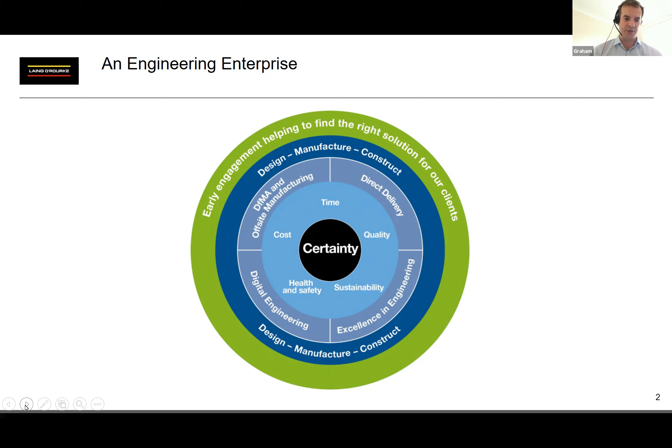Laing, and I always struggle a little bit with how we move this on. There we go. Laing O'Rourke, if you don't know us, we're a tier 1 contractor in the UK, Middle East and Australia. We are an engineering enterprise that continuously strives to deliver certainty to our clients. And I'll talk a bit more about that, and then that explains why we've gone on the particular journey we have. We build a series of great projects, some of which you'll undoubtedly know, but not solely London focused, although the 3 on the right clearly are. Francis Crick, very close to my heart.

I spent the last 10 months of that project's life delivering it because it had major systems integration challenges. So there are some other benefits to being a techie every so often, but obviously we deliver up and down the country. And if I look at what we're delivering today, we're delivering everything from a cancer hospital in Wales, a brand new hospital in Brighton, and we're delivering the Edinburgh St James retail and accommodation scheme in Edinburgh. So length and breadth of the country, really.

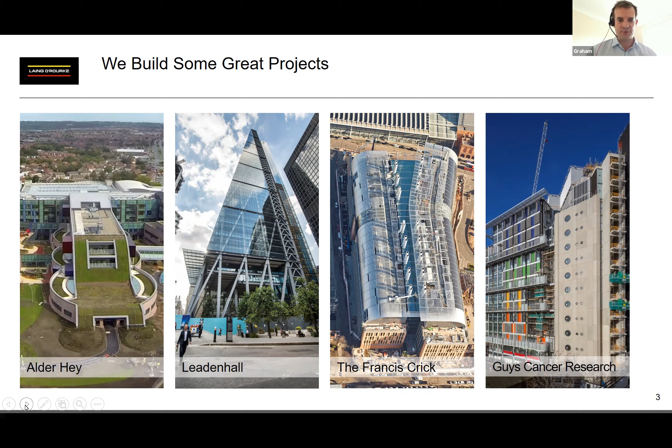As a sector, and it's easy for me to say this, having worked in other sectors, we are extremely behind. Productivity is extremely low. We use a lot of natural resources. Cost is very expensive. We're very slow to deliver using traditional on-site construction methodologies. So back in 2013, the government came up with a Construction 2025 report, which strived to achieve those figures you see on the right. Not easy to achieve. We're over halfway through that, and the reality is if you were to look across the whole sector, I think there's very limited improvement in those statistics, other than perhaps lower emissions.

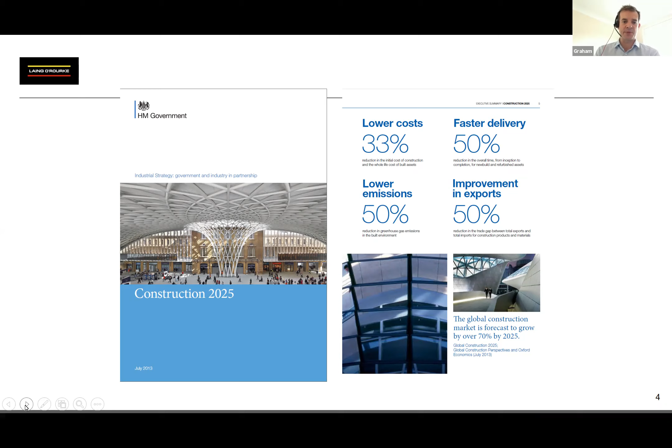There's been a lot done on sustainability in our sector in particular. We've got a slightly different angle to this because we have been working towards this as an individual business, and I'll cover that in a second. If you look at it, because of course one way of getting yourself out of these kind of problems is R&D investment, be it in product, be it in processes, be it in tools and methods. Construction spends 0.5% of sales on R&D, which is woefully pathetic, to be quite frank. We struggle as a sector, and to put that in context, that 0.5% is fundamentally because typically margins in our sector are of the order of 2 to 3% at risk, which is why if you looked at the figures for the last whole year across the tier ones in the UK, we collectively made a loss of 0.5%.

So investing in R&D is very difficult for us, but we do what we can. And one of the ways we have done what we can is to adopt an approach which is called design for manufacture and assembly. So basically off-site construction, construction manufacturing, if you want to call it. So taking, disassembling what would traditionally be done on site and bringing it into a factory environment where we can produce it and manufacture it at higher productivity levels, transport it to site, and then it's an assembly task with significant gains on reduction in labour on site, speed of delivery, and significant reduction in waste and energy and improved quality.

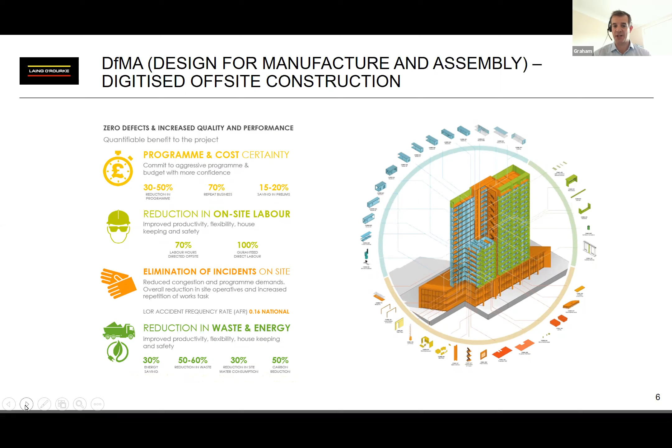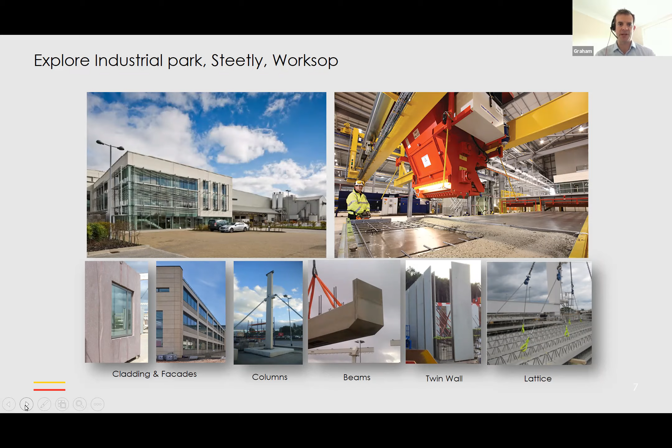If we take that back to the basic components, you can see we're assembling components together, and then we're still using raw material on site. We're using some concrete, but then we've got reduced waste because we've got temporary works from the actual objects that we've delivered, and we then just give things their structural integrity with added concrete.

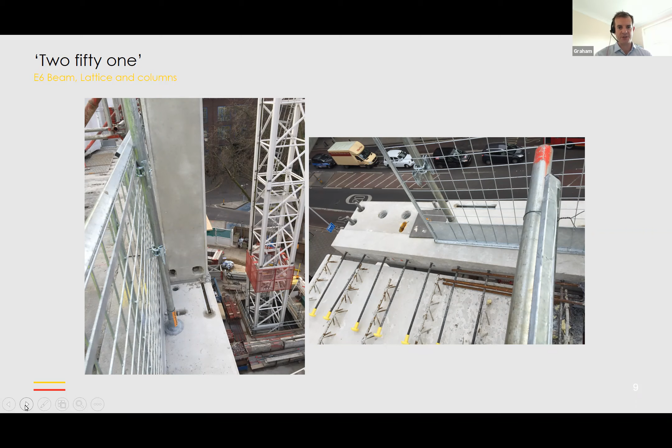We're able to then produce the facades in our factory. Classically what would happen is somebody would be installing glazing at level 40 on the outside or inside of a building, with high risk, working at height, weather, all those kinds of problems causing issues.

However, we're manufacturing the facade in our factory. This is on the floor, somebody installing glazing in a nice environment at head height level, safer, easier, better quality finish, easier to inspect and verify.

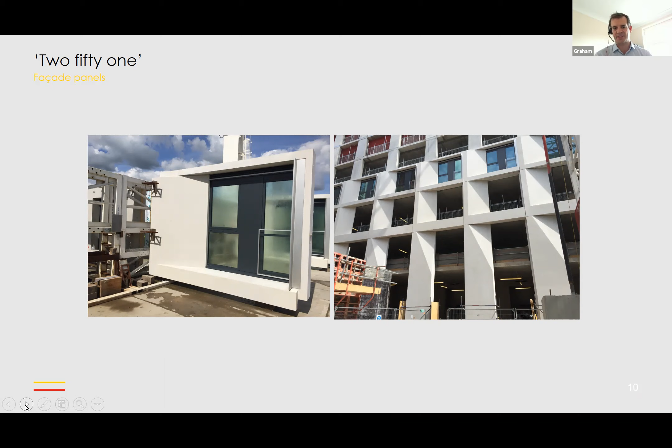But of course, when we've got all these components, it means we need to do more design, more digital design, more CAD, and this is where this digital mock-up to reality comes in. So this is really starting to bring in this concept of digital twin to our sector.

This is this whole term BIM that we have in our sector, building information modeling, and really we've kind of abused it by starting to term it a digital twin. What we need to move to from the BIM model to achieve a digital twin is a real simulation of the performance of the building and how that reacts.

It's not just as simple as capturing data. If you're not able to tweak any parameters, in my view, it's not a true digital twin.

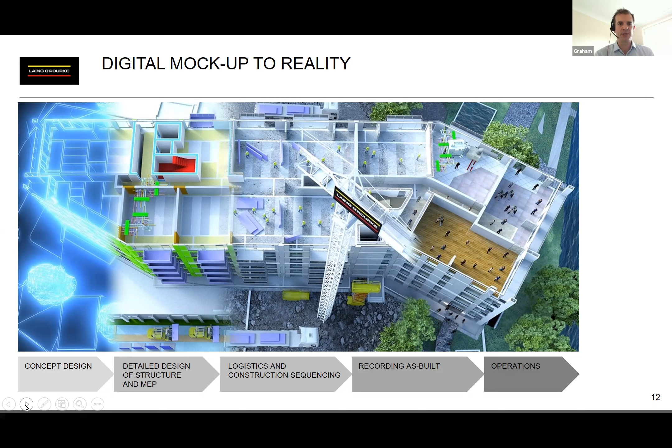So we mentioned we've got all these components, we're having to design them in a BIM model, a digital twin. You then have simple problems where traditionally most of our staff are used to pouring concrete where they need to pour concrete on any given day. However, we've now got a slightly different life cycle where we've got to design a component.

So everybody knows where they're working. They can see by the color coding that it's been manufactured and it's available for delivery. It stopped a lot of problems. We had a lot of problems at the beginning where we just got things out of sequence and missed some of the simple supply chain and logistics. So we developed a bunch of tools and integrated some data sources to make that a lot easier. Nothing rocket science, but the simple things and the visual things have really helped us as an organization.

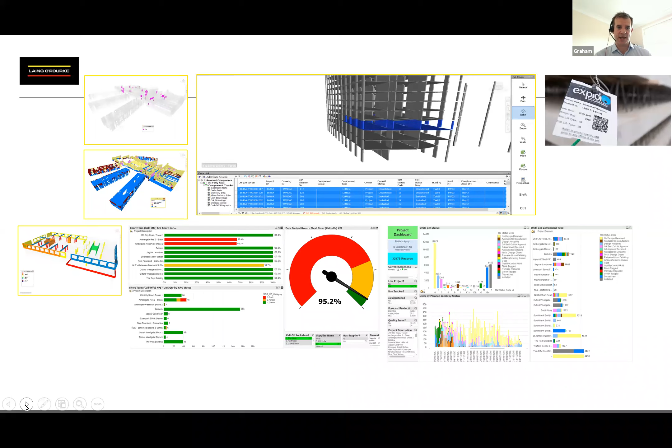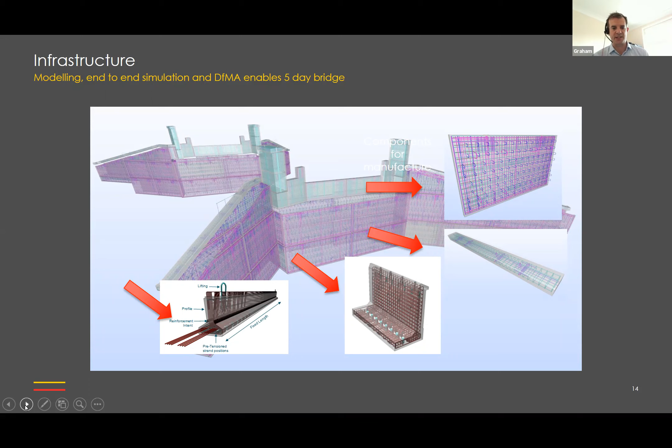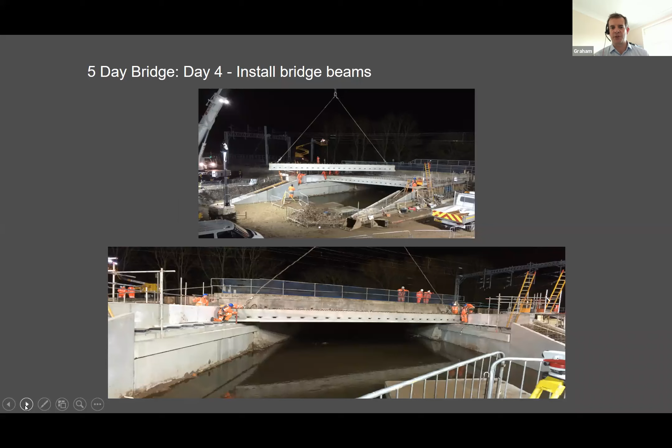We began to install abutment shells on day one, and by day 4 we were installing the bridge beams, and day 5 we then cast the deck.

Building a bridge of this quality and structure in 5 days was unheard of 2.5 years ago. We installed it at the side of a live railway, which is always a challenging environment. Typically this would take 6 weeks or more on site, with a high likelihood of suspension of the line. This gives us a massive gain in terms of our product capability to the market. If you think about the number of bridges required on HS2, upwards of 1,000, you can see the time and productivity gain from building bridges off site and simply bringing them together as an assembly task.

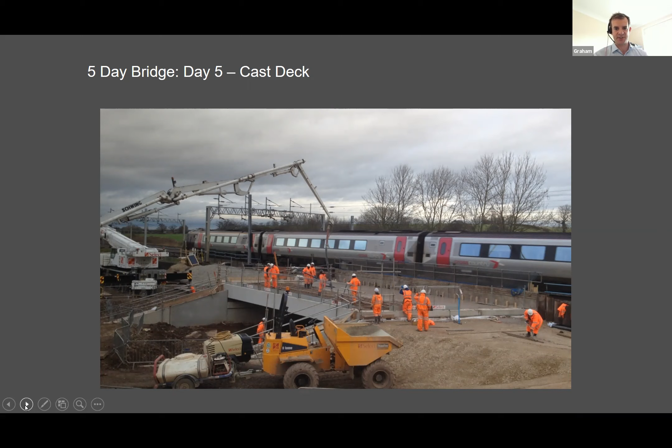We've been doing a lot of work for the past 4 years or so around VR and AR, in-house as well as with some small startup partners. For me, it's really about using the technology where it has the best fit, rather than just using it for the sake of it.

VR-wise, we do a lot with architects, clients, and consultants to walk through buildings and get a feel for scale, because a 2D drawing isn't always a good indicator. It helps with evacuation routes, maintenance routes, and similar things, allowing people to walk through the environment.

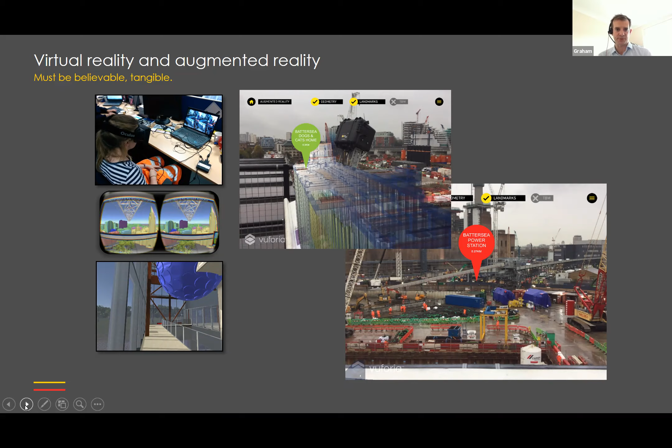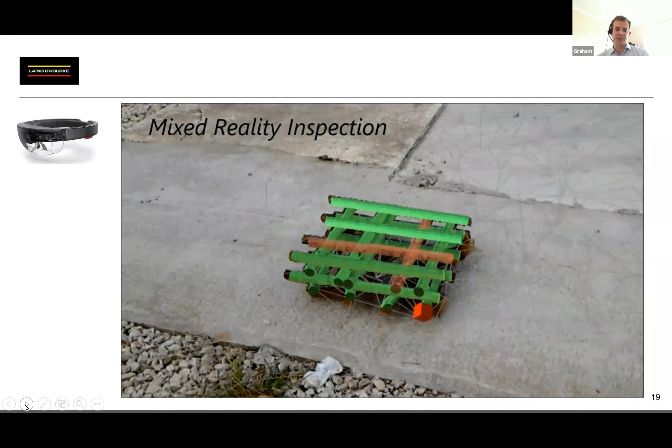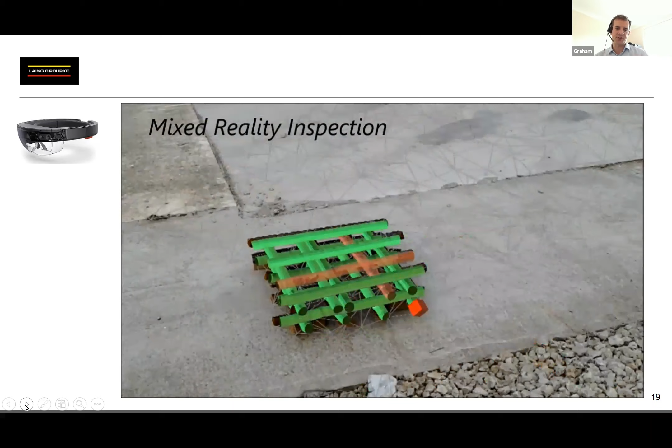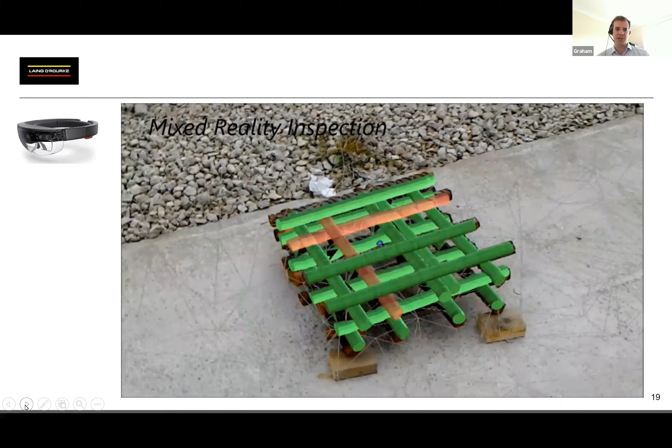Here's an interesting video. One of our students, doing a master's in construction management at Cambridge, put together a demonstrator using HoloLens for how we could do rebar—the steel reinforcement used in all concrete. One advantage is you can see it highlighting bars that are out of placement, letting us think about how to use these new AR tools with a digital model for comparing data and visualizing it to staff on site.

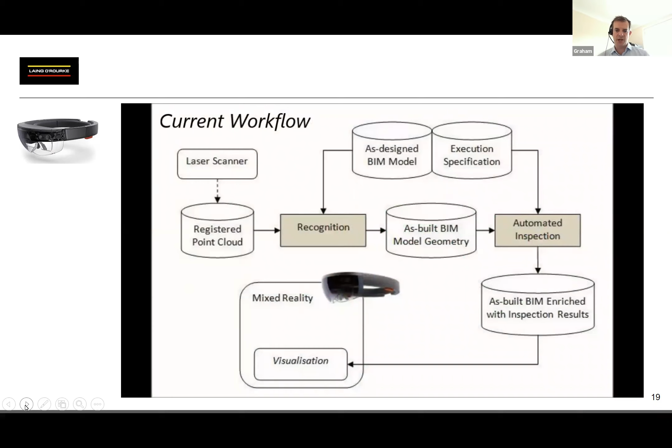Again, it's more of a proof of concept—more a problem with the devices and people's use of them than the technology itself or a lack of use case. A HoloLens at the moment typically lasts 2 to 3 hours, and then there are all the challenges around data and offline data in a construction environment, especially underground. This is where something like 5G could be a real benefit in the coming year or so.

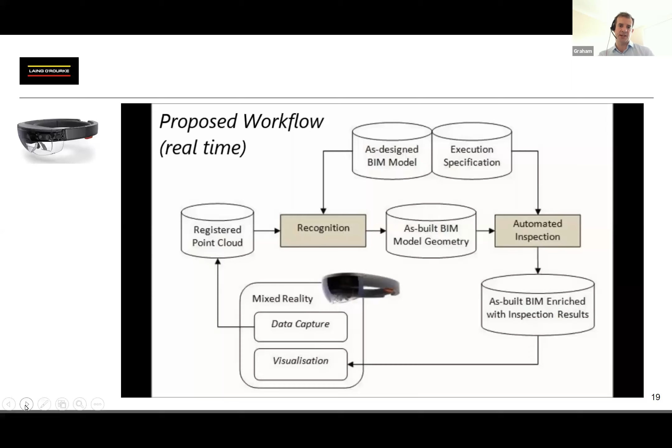Another thing we've done is produce what we call a toolbox spotter—essentially a little camera with AI for automatically identifying potential hazards between humans and machines, like people walking towards machines in operation and vice versa. It's able to distinguish between a person with high visibility gear—hat, helmet, high-vis vest—and a machine.

In one trial, we had a very near miss that was avoided by this equipment—despite all the rigorous safety procedures for interaction between humans and digger operators, someone completely ignored the rules and tried to cut across, and the toolbox spotter spotted them and sounded an alarm. The potential for these technologies on site to help safety and productivity is huge, but the key thing is the human aspect, so people don't assume a machine's looking after them and stop being careful.

Really, it's the 0.0001% opportunity you're trying to catch with this, rather than taking control away from humans.

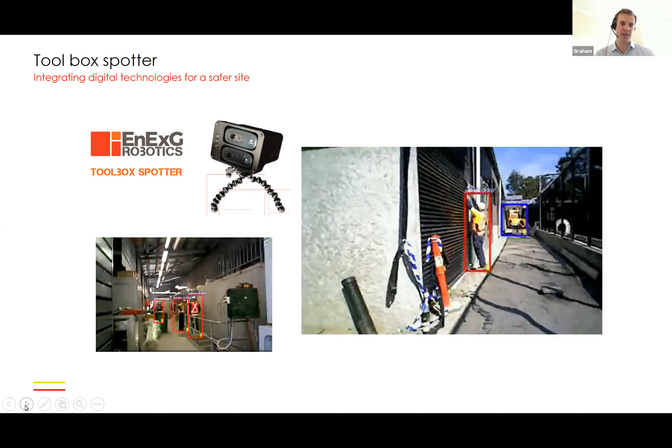We've trialed tunnel surveying with drones on Crossrail. Interesting challenge—if you've ever used a drone, they rely on GPS to fly in a straight line, but you don't have any GPS in a tunnel 30 meters underground. So it forces an operator to drive it completely manually, with no automatic course correction. All these things are somewhat problematic if you want to start automated surveying, and they're challenges we need to resolve to use this technology, which could have a massive benefit for us.

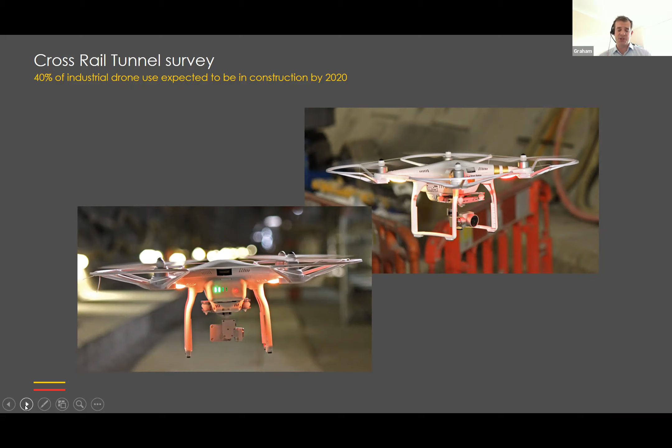Crossrail tunnel linings is another interesting one. Crossrail's not yet open, so we've not seen any of this, but I can assure you the tunnels are all there and the stations are all there and installed.

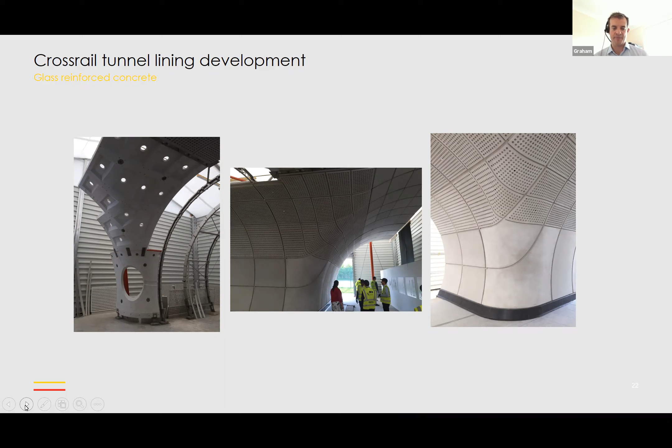This is a product set we developed. We have a sub business called GRC, glass reinforced concrete. The aim being to produce structural tusks which are double curved, and then the actual station lining surfaces. Being double curved requires very complex molds to be machined and manufactured, costing tens of thousands of pounds each to then spray this glass reinforced concrete. This product has been blast tested, so it's quite a high-end product, but it's not heavyweight concrete. It's lighter weight.

So we had a problem. I've mentioned multiple tens of thousands of pounds per mold. So we'd been working on some additive manufacturing in one of our research groups in Australia around 3D printing wax, and then machining that wax to deliver a mold, meter by a meter.

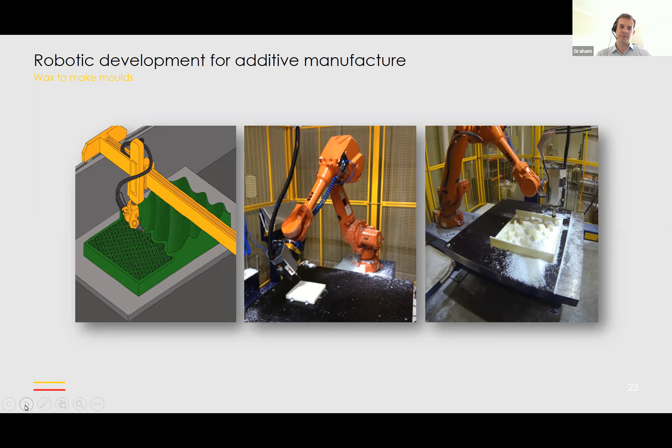For the Crossrail stations, we decided to upscale that 3D printing facility to 6 meters by 30. We've got a huge machine for printing the molds that we then spray the glass reinforced concrete in. There's actually 2 print heads, so it's not to do a whole 30 meter by 6 meter panel, it's split into 2. That's the aim.

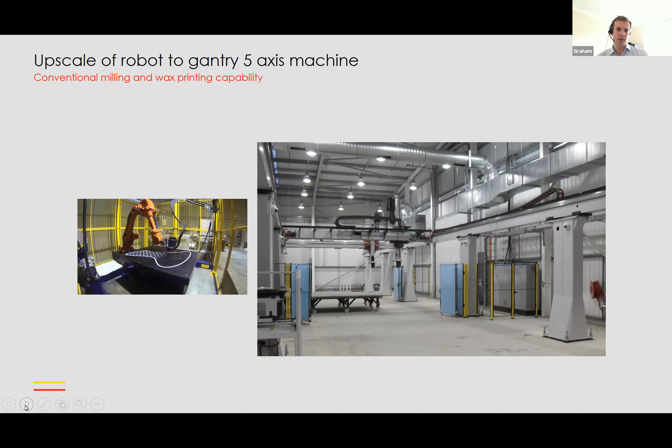That's really then starting to open the mind about what you can do with concrete, because you've got a mold to spray it on. There are lots of simple examples of 3D printing concrete direct. They're very simple for a reason at the moment. We need some advances in materials, and we've taken it from a different angle, which is to work on the mold side of things, and then spray the concrete onto the mold.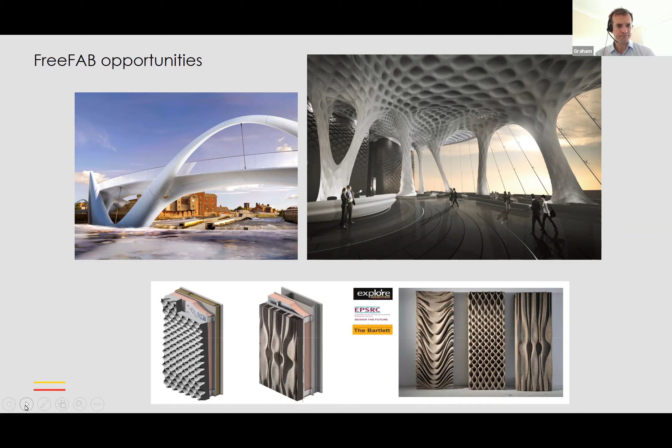So again, lots of technology. We're very open-minded to technology development. Of course we can't do it all on our own. We've got quite a collaborative approach, and we use the typical technology readiness levels, manufacturing readiness levels. We do a lot of work with university in the level 1 to 3 scale, but that tends to be looking a bit further out. We've actually done quite a few projects with the Advanced Manufacturing Research Centre, part of the High Value Manufacturing Catapult. That's been really successful, taking technology in that 3 to 6 valley of death area, and maturing it.

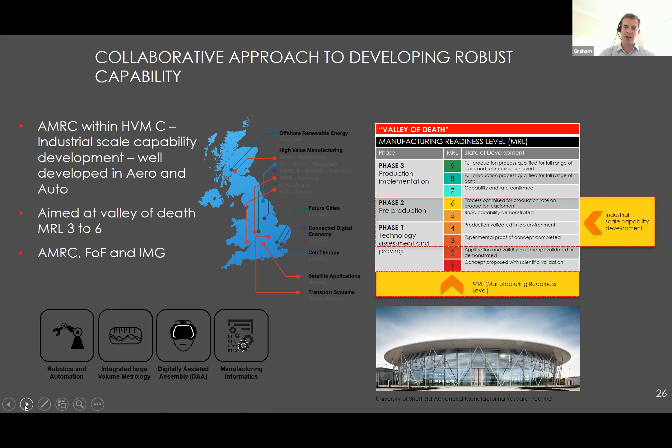So if I give you a flavour of some of that - we'd already talked a little bit about augmented reality. We've been doing a little more on wearables. This is around what would it take to be able to speed up commissioning of control panels in a safe manner using augmented reality. That's been really interesting, integrating Bluetooth electrical testers with the model, with the commissioning instructions, and presenting a set of sequences to an operator.

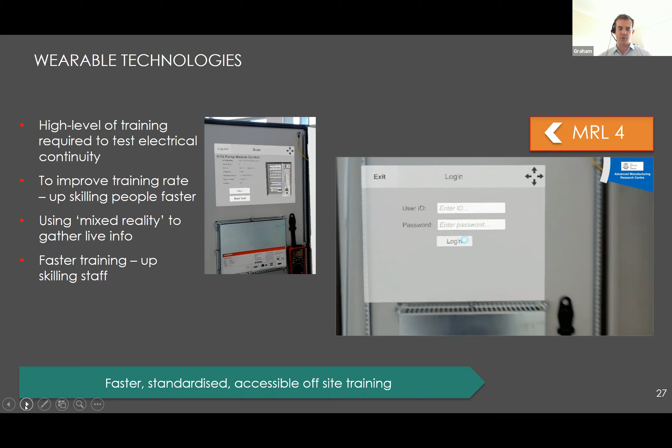We've been doing some work on facade development for modular housing with robotics. We're currently about to launch a new factory where we'll be doing a pilot scheme. This isn't going into production in the next 18 months, but we've been working with AMRC around producing the facade, and we need to place about 70 bricks or brick slips a minute. That's no small feat. So we've been using the kind of picker arrangement you can see in the middle. We've got brick grading based on size, based on color, computer vision, combined with the robots. Quite a challenging environment. But this is the kind of stuff we need to really advance construction manufacturing now, and in particular modular housing.

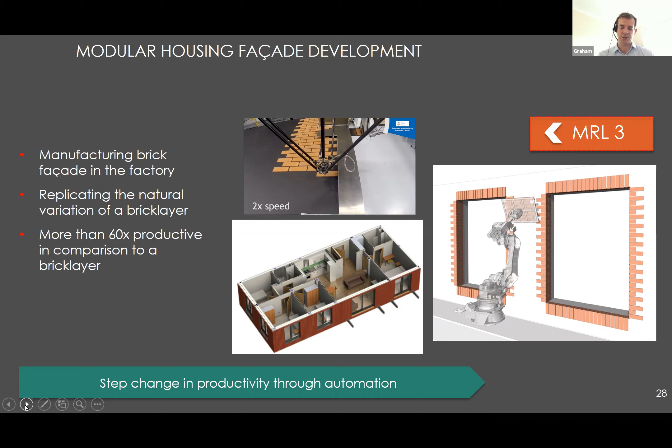So now I want to go, I'll just have a quick drink. Now...

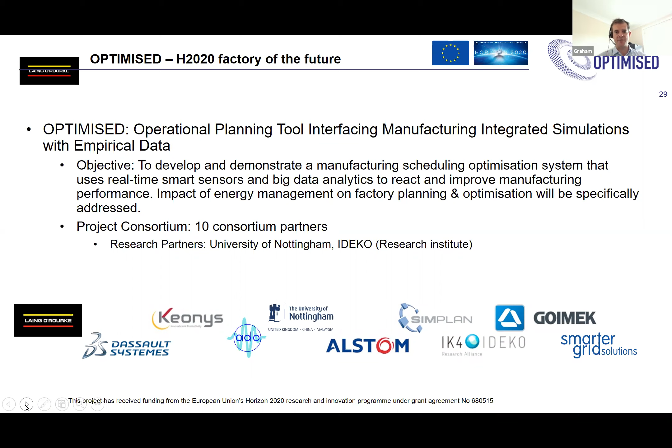I want to go on a bit more of a left field tour on a Horizon 2020 project we recently finished, and I've got two quite large use cases that I'll talk about. So OPTIMISED received funding from Horizon 2020, competitively bid - 119 projects, 8 were awarded. Really thinking about Industry 4.0 type technologies, how we could apply that to manufacturing, and to improve productivity and performance in manufacturing. At the time when we spec'd up the bid, it was around 3 key principles, which still hold true: measure, simulate, and then optimize.

So what do I mean by that? Measure - we wanted to integrate data that we already captured in the shop floor that wasn't used. We wanted to add IoT sensors. We wanted to bring in wearables for some of our staff.

Simulate was about creating a factory simulation model, but then feeding it with live data, so that we could understand whether the model, based on the data we were providing it, held true for today's production. So were we running behind? Were we low on staff? Are there any machines running slower than we're expecting? And then the optimized side was, okay, when you do identify something's wrong, can you optimize your production for the day, either by moving people or changing what you plan to manufacture today, to actually deliver what really drives your KPIs on a given day.

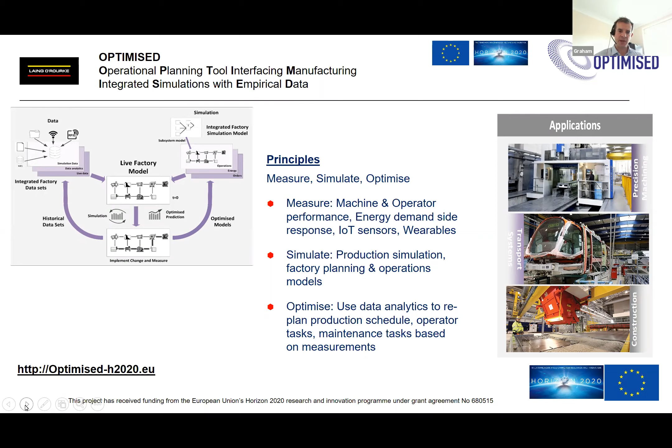3 demonstrators. I'd said at the beginning this was all about manufacturing. Turned out not to be all about manufacturing. So we had 2 manufacturing cases, one in Laing O'Rourke, one in a Spanish precision manufacturing business. And then the other one was the maintenance, repair and overhaul of the trains on the West Coast Main Line in the UK, so the kind of MRO scheduling. I'll talk about those in a bit more detail.

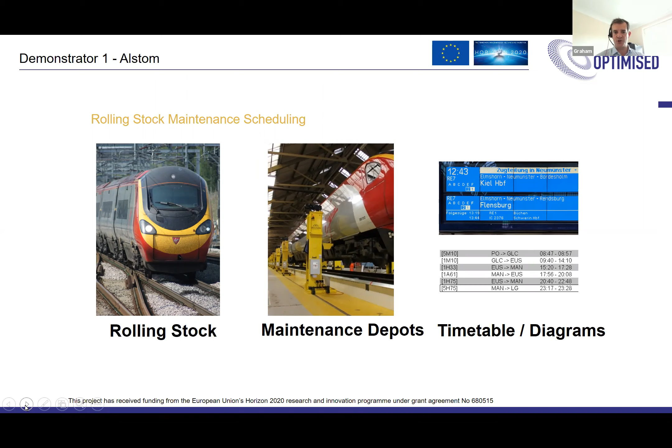Alstom Transport maintain all the rolling stock for the West Coast Main Line for Virgin. They have a number of depots. They've got 5 depots, 56 trains. Every 20,000 miles, the trains need to have a statutory service. 20,000 miles is about 23 days, if you nicely route balance the trains on the network.

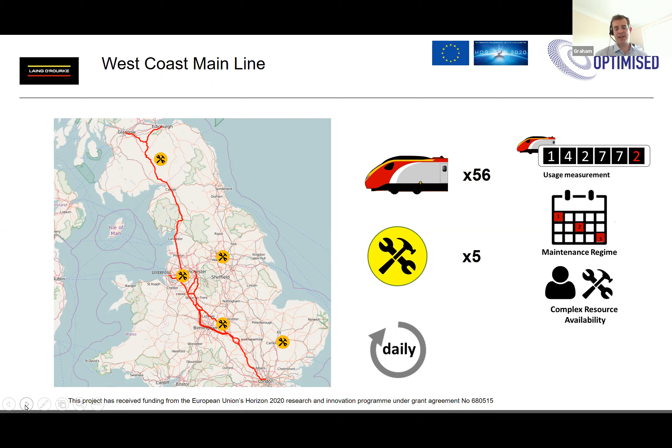So at the moment, every day, the 56 trains are assigned to a particular route - so that'll be London, Euston to Birmingham to Liverpool, then back to Macclesfield to Manchester. That has to be done every day at the moment for 56 trains. It takes a human 3 hours to do that activity. As you can see from this diagram, it's quite a complex task of routes, and you can start to understand why they only ever schedule 1 day ahead, and it takes them 3 hours.

Bearing in mind the 20,000 miles is 23 days, the perfect world for them would be to forward plan every single train for 23 days. Because what really happens at the moment is, because they can't guarantee a given train will get to a particular destination on time - there may be problems on the line, or they may have to swap trains out because they're suddenly expecting higher capacity on a particular route - they have to over-maintain. They over-maintain at around 18,000 miles, which basically means every 9 times they run a maintenance activity for their statutory maintenance, they've done an extra sequence of maintenance.

Which clearly is a commercial loss to them. If they could reduce that over-maintenance, squeezing from 18,000 up to 19.5, 19 and beyond, that's a big commercial benefit. So to optimize that, we recognized as a project that we needed to create a digital twin of the rail network.

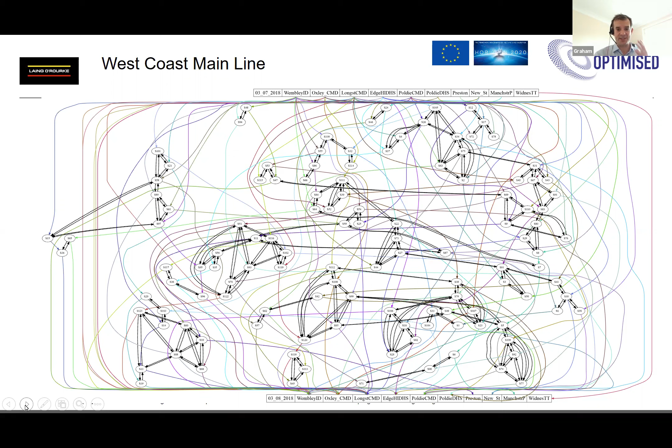This is an interesting story - we had a lot of pushback from Alstom, the client, about the need to create a digital twin and why would we want it. It's got no benefit, nobody's ever done it before, and we had to really convince them to believe in us. The second we generated the digital twin, which I'll show you in a second, all of a sudden the light bulb went off with the client. They suddenly realized they could play what-if scenarios, change the number of trains, change the number of depots, move the location of the depots, and it would help give them a KPI assessment of performance. So that's been a massive light bulb moment in Alstom.

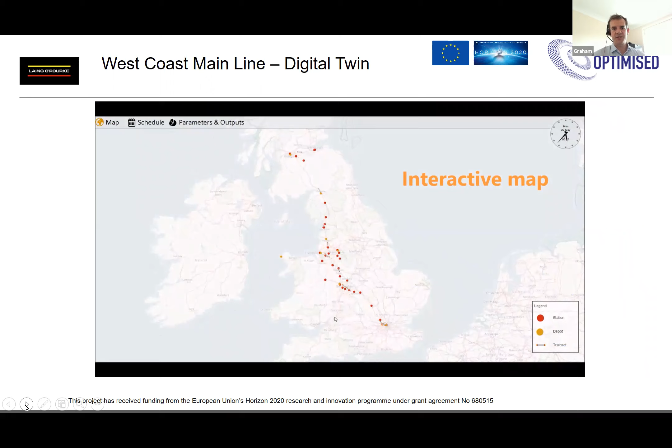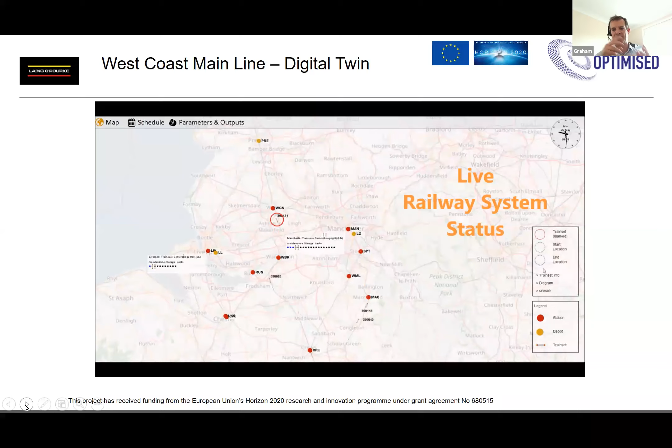This is the digital twin tool and a video of it running. You can see, it's obviously time sped up - the train's moving along the routes of the network. You can then zoom in on a particular train to understand what it's doing. You can understand its mileage logbook, so you can check how its mileage growth is happening. Now they're fast forwarding multiple days, and you can see the plan for that train and its operational state and maintenance state. So they could have certainty that the digital twin was operating as per the rules they'd given us, and was forward calculating for the 23 days.

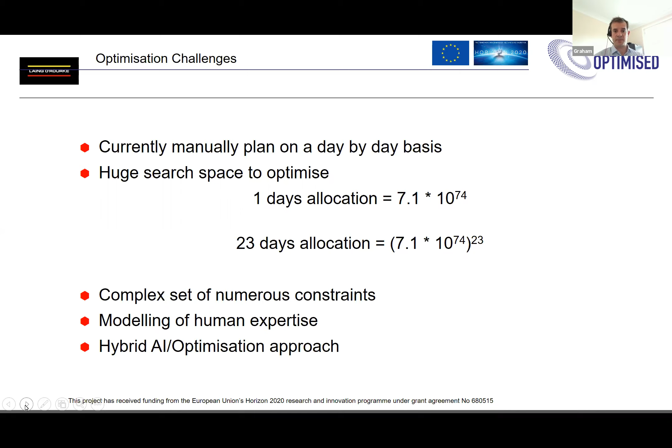Now, to try and optimize that search space of 56 trains, it's quite a complex search space computationally - it's 10 to the power 74, and that takes a human 3 hours. If you want to do 23 days, it's 10 to the 74 to the power 23. That's an enormous search space. But really, that's just a computational search space. What we've done is we've put a number of constraints, which in essence were the intelligence we gained from the operators - so we modeled the human expertise. And then we've just got a simple hybrid AI optimization approach to really look for suitable candidate optimizations.

To give you some results, we managed to reduce over maintenance by 60%, taking the 18,000 up towards the 20,000. That 60% reduction in over maintenance is an enormous commercial benefit for Alstom.

Planning time reduced, it says 83%. In actual fact, we took 3 hours down to 19 seconds, which is 99.7%. But we've only claimed 83%, because they have to spend 29 minutes checking the output of the tool since it's not production ready. We need to go through a validation and productionization phase.

In terms of benefit to us and to Virgin, they've managed to significantly reduce the train swaps. They're trying to get a particular train to a particular depot that evening, and they reduce that because they're able to forward plan a lot better.

The chart on the bottom right shows computation time versus number of days of simulation. The chart goes up towards 16 at the end, and that's only 1,000 seconds. So whilst it's going exponential at that point, this is just a matter of throwing compute resources at it. When you're trying to pre-plan 23 days, you don't need an answer 5 seconds later—it's quite happy to leave it running for a couple of hours and plan the next month.

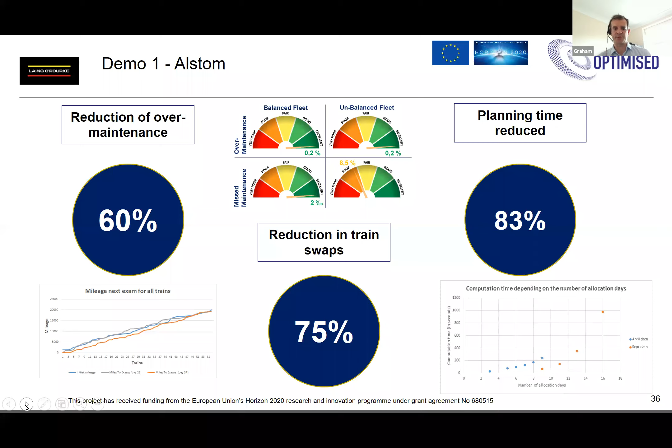If I move on to the Laing O'Rourke case, I'll just run through a video so you can see our factory and the context of the project.

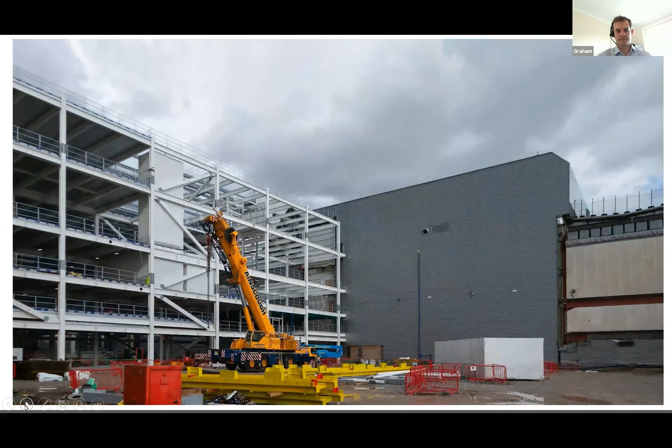Well, the answer is yes, it would be financially beneficial, but given that we're quite a low power consuming factory in reality, it's not as at the scale I would have one day dreamed of. We did the cost model, and it's a 13k benefit. However, we're under a megawatt, and normally we wouldn't be part of a demand side energy scheme.

But of course, if you were running a big factory with multiple megawatts of power capacity, we believe there's significant opportunity to be had from using a scheme like this and getting benefit from sending a demand side signal to the grid.

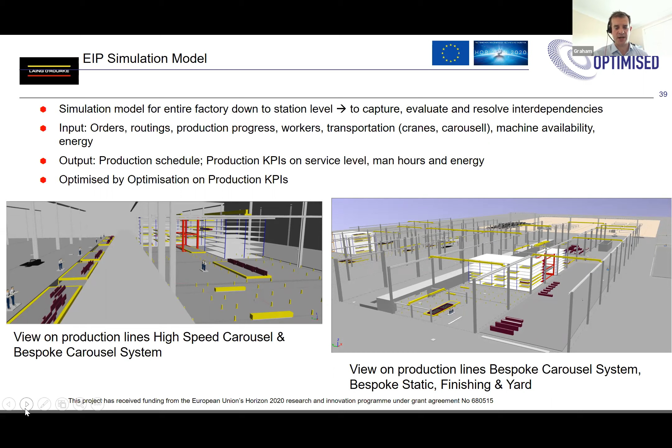It's quite a flexible architecture that we've created, so it can be either on-prem, up in the cloud in Azure, or actually a mixed cloud on-prem scheme like this.

One of the things we recognized was it's fine generating lots of IoT data, but how do you actually guarantee that you get it to the cloud if you've got a slow connection, or a connection you're not the priority on? So we recognized we needed to create a kind of data collector instantiation of the middleware that would just buffer the data, and then as and when the internet connection was available, it would upload that to the live modeling and sequencing environment.

Luckily, we're not generating gigabytes of data per second, but in that kind of scenario, this is absolutely vital. We could have probably bypassed this at risk, but we wanted to create a flexible architecture that supported this eventuality, because the plan is to install this system on our next advanced manufacturing facility that we're planning to build.

The importance of dashboards and diagrams can't be underestimated, and one of the things we found particularly useful is, irrespective of the digital twin or the optimization, it's just been surfacing data and making some of that data visually available. So you can see the spider diagram in the middle.

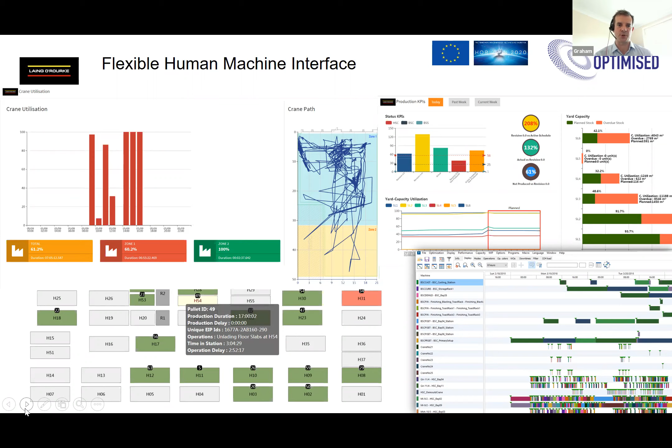So to give you the overview on the numbers: 2% service level increase, which is really just delivery on time orders. So not a major gain.

The interesting one for us has really been the staff cost reduced. Now, this isn't about reducing people, and it hasn't reduced people. What it's actually done is better allow us to understand how we could better schedule our shifts and shift patterns, and the number of staff on those patterns, to deliver a certain KPI productivity through a given week.

Because of the type of contracts we've got, this means we're reducing significant overtime - the type where people have already done a 5-day long week and then we suddenly ask them to work the weekend because we're behind and need to get product out the door. So we're seeing real positive benefits from this type of scheme in reducing the stress and demands on our staff.

It's nice to have a planning time reduction of 60%. It makes the planners' job easier and allows them to focus on real value-add rather than the simplistic task of planning. But if you get a disruption where 3 people don't turn up today or a machine breaks down, the capability of the digital twin and optimization algorithm to present a number of solutions to the operators is a real benefit and a real stress reducer.

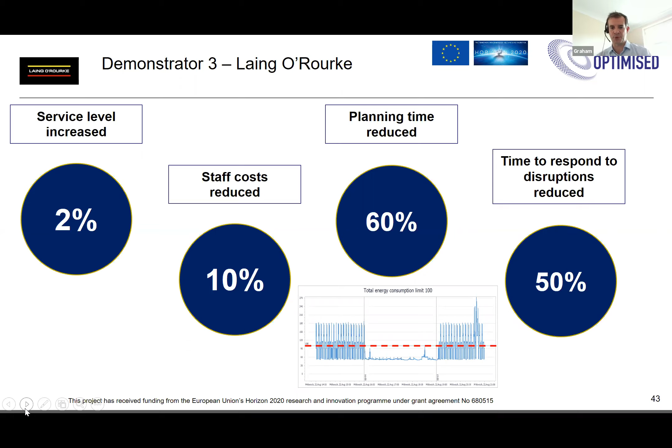And the diagram at the bottom demonstrates that we were able to reschedule factory production when we had a demand side response - you can see the level where we had to cap energy to. So we simulated this, and how we could carry on with some production, and then how we would reschedule the rest of production. And that was it, to be honest.